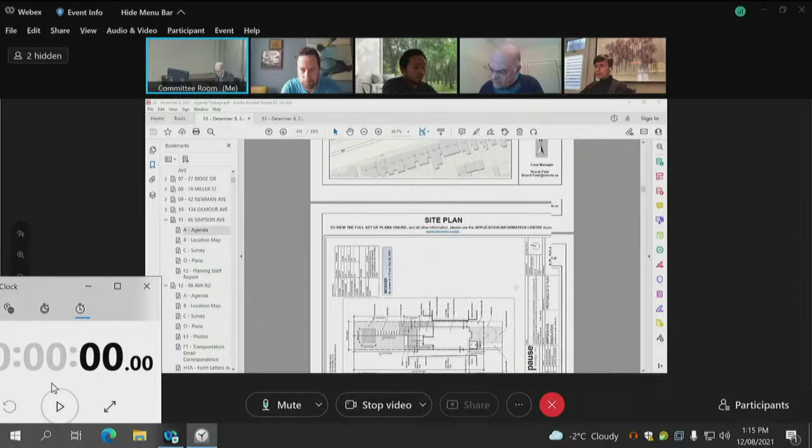So, applicant, join us please by stating your name. Afternoon, Mr. Chairman and committee members. My name is Jason Ho from Pause Design. I'm speaking on behalf of the homeowner. Very good. Thank you, Jason.

Jason, I'm just going to check. We have one person standing by who is noted to be of interest. I want to see whether that person can... Through you, Mr. Chair, that person was here. I'm looking now and they're no longer here, so I just want to give them a quick call. We'll just hold for a moment. I'd like to see if we can further define their interest in the application. So Jason, just stand by for a minute, please. Yep.

Hello, Danny Chan. Yeah, speaking. Hi, this is the Committee of Adjustment. We're reviewing 66 Simpson Avenue, and you registered to speak. Yes, there was just some technical difficulties on my side. Is it my turn to speak now?

Not quite. This is the chairperson. Could you tell me, please, do you wish to speak in support of the application or in opposition to it? Well, to be honest, I just wanted a little bit more information about the plan. I got the plan in my mail, and I had some specific concerns. I don't have any big opposition to it, but if maybe the applicant could clarify some of it, then I can probably be more in support or opposition.

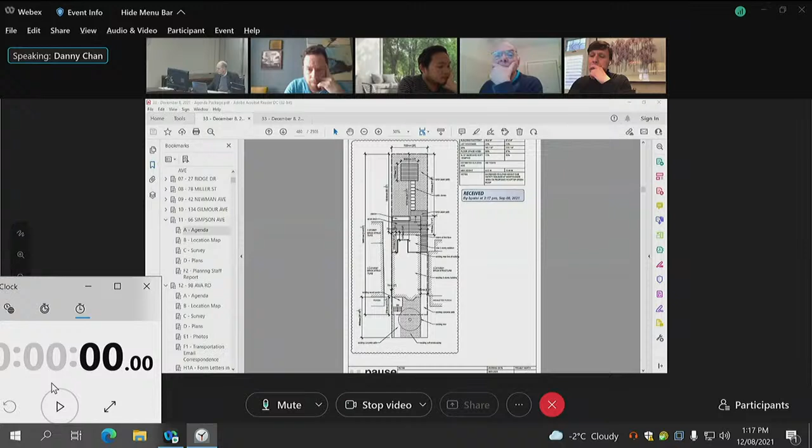Thank you. So the owners have purchased this whole structure, which was formerly used as a group home that is of a modest footprint, quite small compared to the rest of the houses on Simpson Avenue. So what we're looking to do is get a rear addition on the back side of the building, taking basically the same footprint or just slightly larger than the existing multi-story wood deck.

And the owners have a very keen interest in greening their dwelling, so we are proposing installation of an extensive green roof on the existing structure. They also have elderly family members who potentially will be moving in, so we're looking to improve some of the spaces within the house to facilitate the cohabitation.

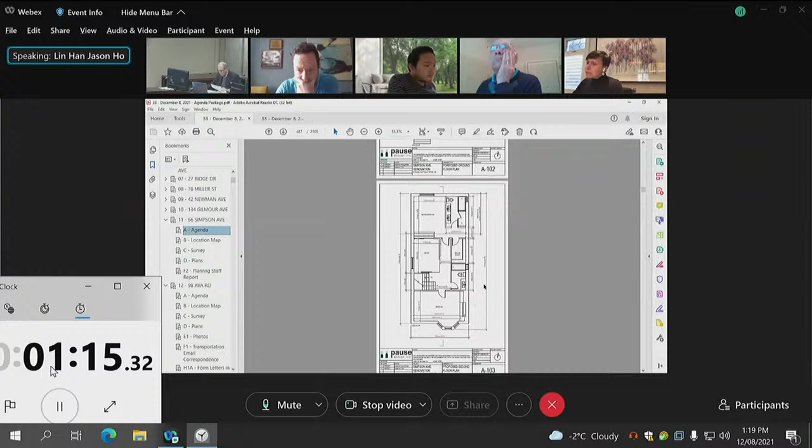So in terms of the variance that was identified, the primary concern about the height exceeding the 10 meter maximum has to do with the guardrails we are erecting on a small maintenance area proposed for the intensive green roof on the rooftop. The guardrail would put us at 10.044 meters, just slightly over the 10 meter mark, but the main structure remains below the 10 meter maximum height.

We are proposing a small utility area on the rooftop because of the intensive roof proposal, and we need a space for water connections and also a space to maintain the green roof. Because of the elderly family member, we chose to put in a full set of stairs to access that small maintenance area rather than a ladder for safety, and the guardrail is also to facilitate the safety of the family members when they're up there taking care of the green roof.

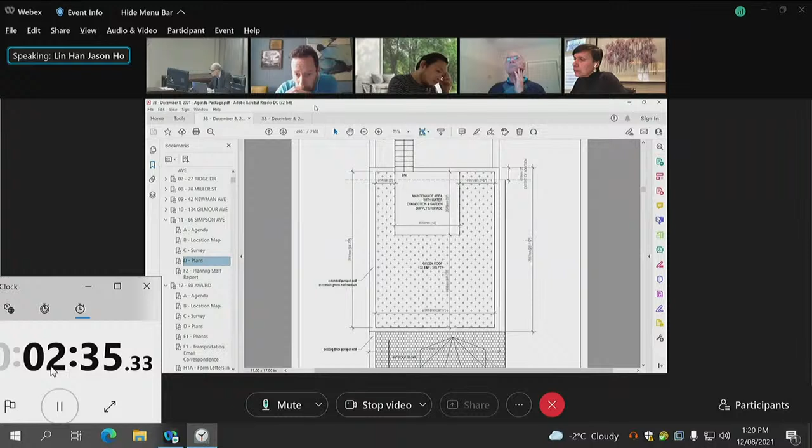So the existing structure already exceeded the maximum percentage of the main wall over 7.5 meters. That was the second variance identified. The addition is significantly lower than the height of the overall existing structure, so we are certainly hoping that the addition doesn't pose additional height challenges.

There's no parking currently available on site, so we're not seeking to change that. The existing structure is about 0.8 meters from the west side lot line, and we are hoping that the new addition, as well as the rear deck that extends out from the addition, could align with the setback on the west end of the building. So that's sort of the variances we're looking for. Thank you very much. Thank you.

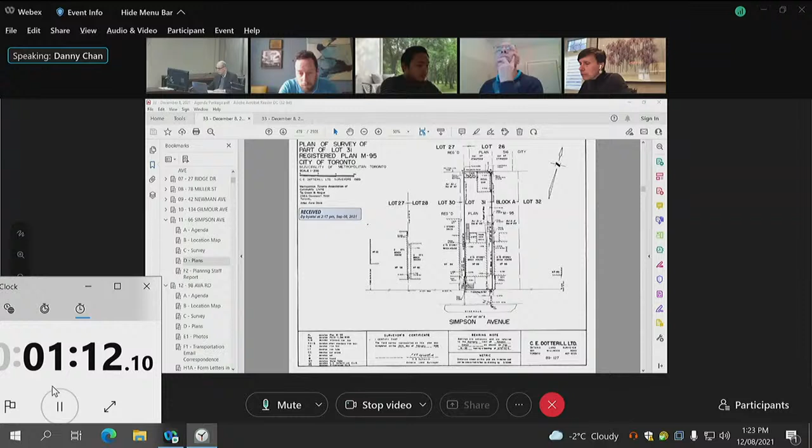We are not seeking to install any fencing different from the existing extent of the fence on site. What we're looking to do is clean up the backyard area. Currently there's some rodent infestation issues, and it's not very sightly, so we just want to clean it up.

We're not looking to impede your ingress to your backyard. So you're saying the access provisions made by the mutual drive will not be blocked, will not be reduced? Exactly. Thank you.

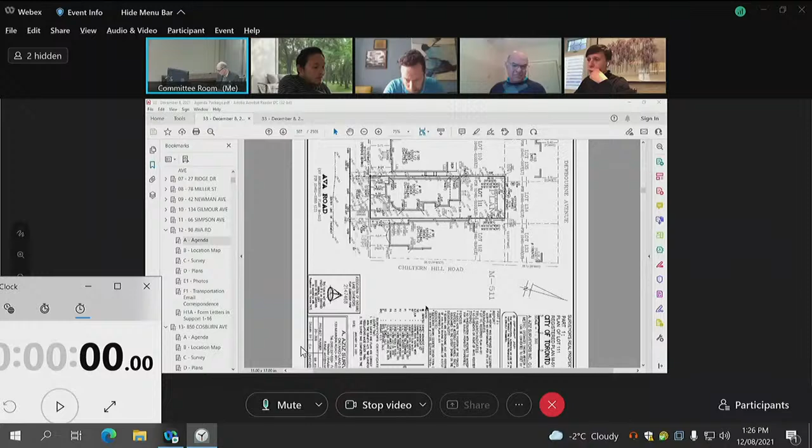The panel moves on to number 12, which is 98 Ava Road. We're looking at applicant materials: there are 5 photographs of existing trees from August, a commenting report from Transportation, and correspondence in support, including 16 form letters by owners and occupants of Ava Road, Chiltern Hill Road, and Dewbourne Ave, all received by November the 29th.

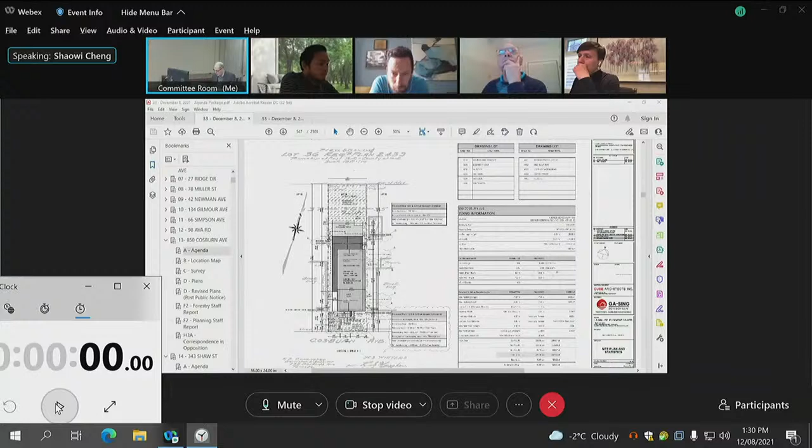Thank you. The existing house is a one-story building lot. So we have a new proposal to demolish the existing house and build a new house with 3 stories.

We are requiring relief from the requirements of zoning bylaw as amended. We have 6 variances. Number 1, the permitted maximum height of buildings is 8.5, but our proposal is for 3 stories with building height going to 9.95 meters. This is the same requirement from bylaw number 6752, same as citywide.

Number 2, the permitted maximum height of all front exterior main wall is 7 meters. So our proposal is 8.6.

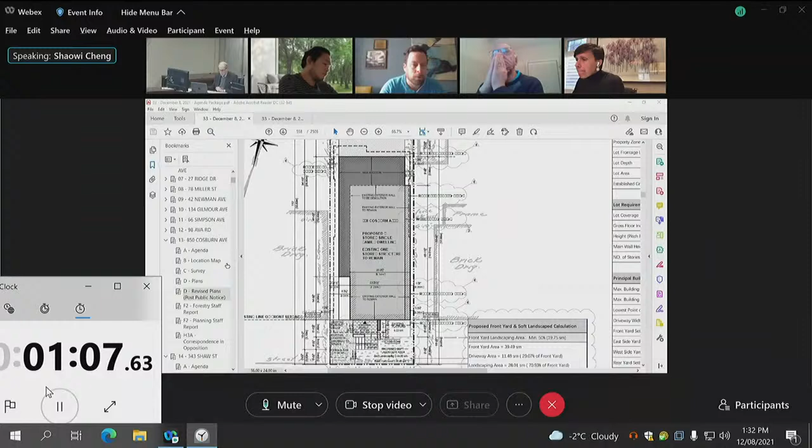Number 3, the permitted maximum FSI is 0.45, so our proposal is 0.98. Number 4, the permitted maximum lot coverage is 35%, so our proposal is 43%.

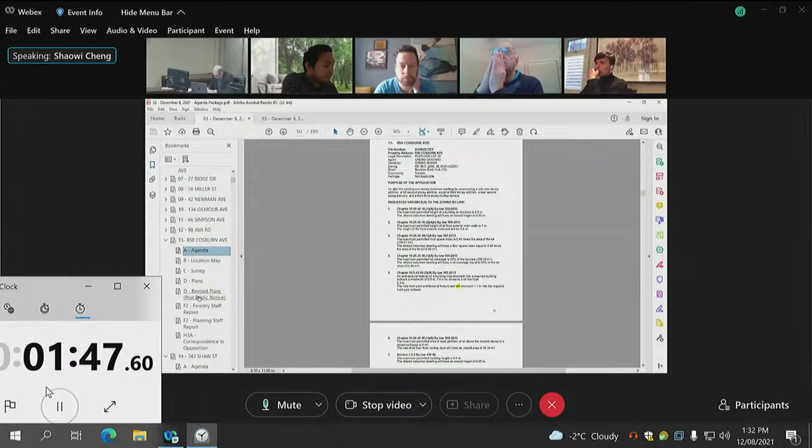Number 5 is the architectural feature wall, so you can take a look at the front elevation. There is a particular decoration wall that is extruded to the front yard 1.1 meters, but based on zoning bylaws the required maximum is 0.6. So the front elevation, I think on another sheet, yeah, this one - this wall.

Number 6, the final variance is regarding the roof terrace. Bylaws state the maximum area for the roof terrace is 4 square meters, so our proposal is 9.76. After we discussed with the planner, based on their suggestion, we reduced the original 40 square meters down to 9.76. So totally 6 variances for today, that's it, thank you.

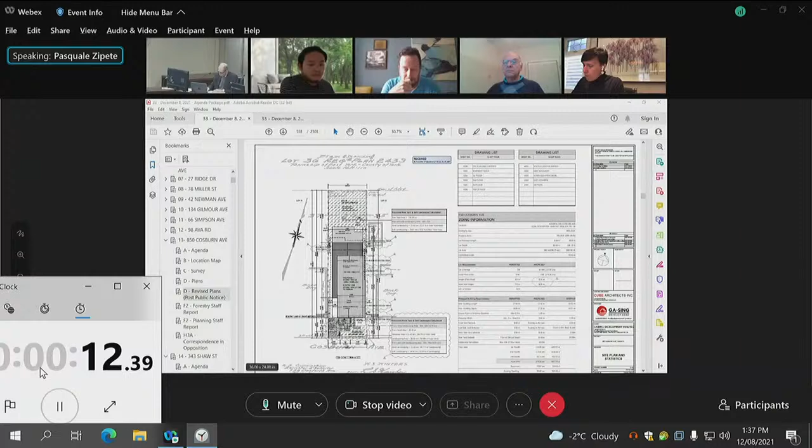First, if you look at the frontage of our homes, pretty much every front balcony and front door is completely flush. From the corner of Rednor to Woodbine there are 4 homes, and we're all equal - if we open our front doors we can see across. This new development's front porch will go at least 3 feet, 4 feet 3 inches further out than our homes. Then there's the issue of height, which is 1.45 meters higher than my home.

We have a bay window on the side of my house, which will face their side. I'm on the east side, so that wall will lose all kinds of sunlight because of the 3rd story. I have a 2-story house to my left on the east side, which I don't oppose - they did renovations a couple years ago which were great.

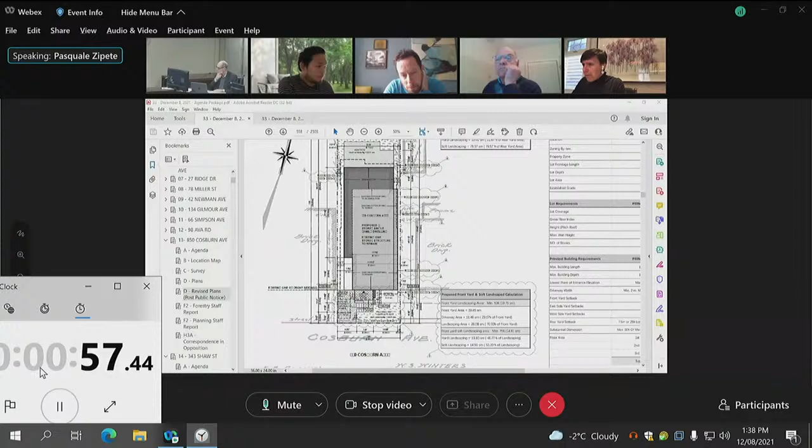The square footage of the home is also much larger. They extended the house further back, almost 9.9 feet, and I have a deck in the back where we spend most of the day. I have 3 kids who are in the yard, we sit on the patio, so we're going to lose a lot of sunlight.

The other concern is the front - there's multiple concerns because almost all of what they're requesting is way above the standard. We're 4 homes on this block of Cosburn between Rednor and Woodbine, and there's a 2-story home to my left, and we all follow within code. The 3rd story is really high to me.

I'll lose a lot of sunlight, and especially in the backyard they'll lose privacy because they're going to put a back deck patio looking over our backyard. There was one more concern I had.

The size of the home is a lot bigger, but there are a lot of variances. If you look at the houses in East York, especially on our block, they're pretty much all the same - if there's a 2nd story, it stays within the width and length of the home. They don't exceed almost 10 feet, losing all that sunlight we have in the back.

There's a couple other issues I had. I'm worried about water runoff, because with that 2nd story and the drainage, now they've occupied more of their property, and hopefully they can properly manage the rain into the grass.

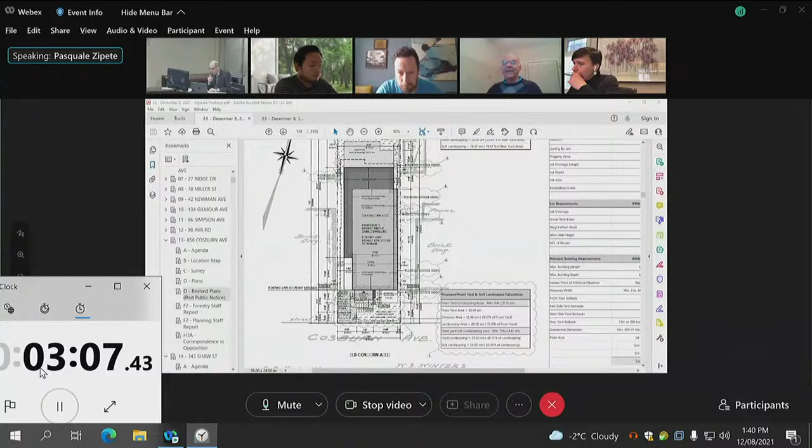Thank you. Panel, any questions for the speaker?

So we've heard from both the neighbors on both sides of the subject property.

Okay, let's go back to the applicant. Thank you, applicant, you've heard from both of your neighbors on both sides. They're both concerned about your development. Go ahead.

Okay, can you show the site plan on your screen? Basically, look at the front wall - it is flush with the existing house. The light gray area is the profile line of the existing house, so the front wall still stays there. We are not going to project or extrude into the front yard, so we are not going to block the view from the neighborhood.

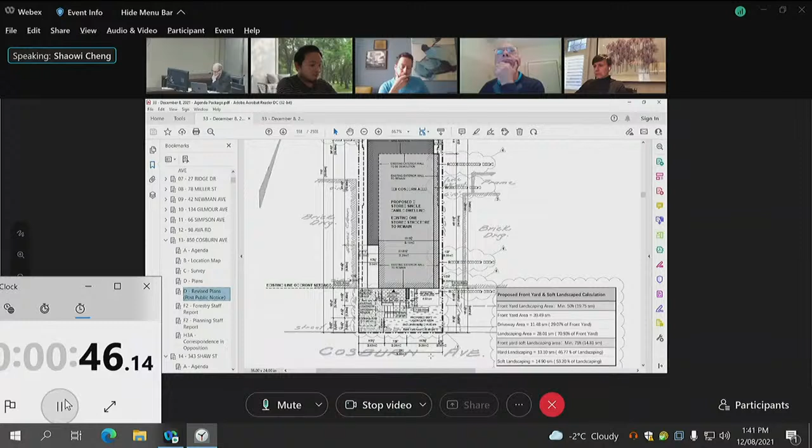Second, we have a 3-story building, but actually only 2 stories from the front and back. The 3rd story is set back, as is even the 2nd story setback. Can you take a look at the side elevation, please.

Side elevation. Right side is the front, left side is the back. On the right side, 3 stories, but 1 was setback from the front, so only 2-story in the front, about 6.83 meters. In the back, we still setback on the 3rd floor, so we don't want to make the building very aggressive. Look at the dotted line showing the existing building outline - the front wall basically is there, so our proposal is to flush with the existing wall.

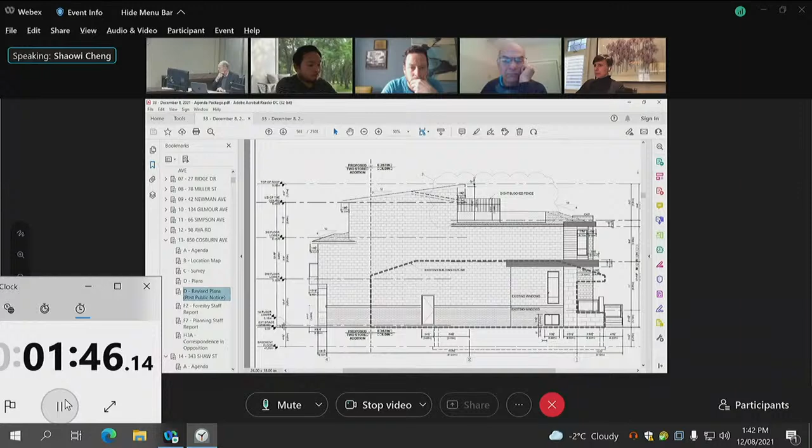Regarding the driveway, our right neighbor said they have a driveway in the backyard. But our house is just within our property and the setback from the property line, so I don't understand how adding new construction will impact their driveway. Another issue is regarding water runoff - adding construction here, we are not changing the horizontal stormwater collection area. Whatever we do, the lot area is still there, so the water from stormwater, we are never going to change the collection area.

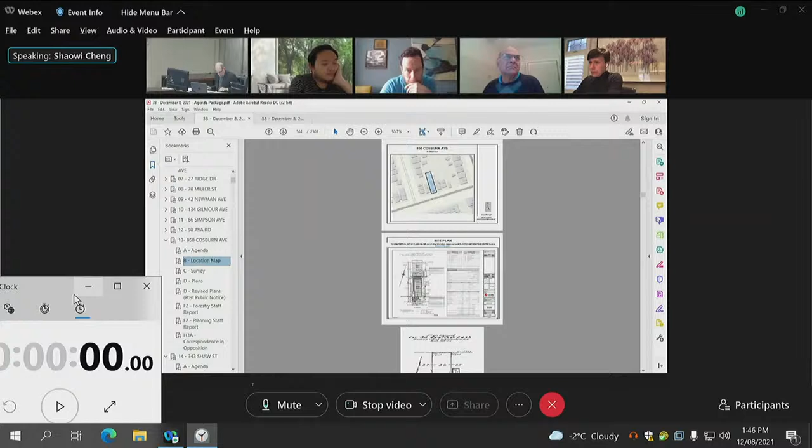Regarding three-story buildings on this street - 820 Cosburn Avenue, only 5 houses away to the west, is a three-story building. Another three-story building is 301 Woodmount Avenue, 7 houses away.

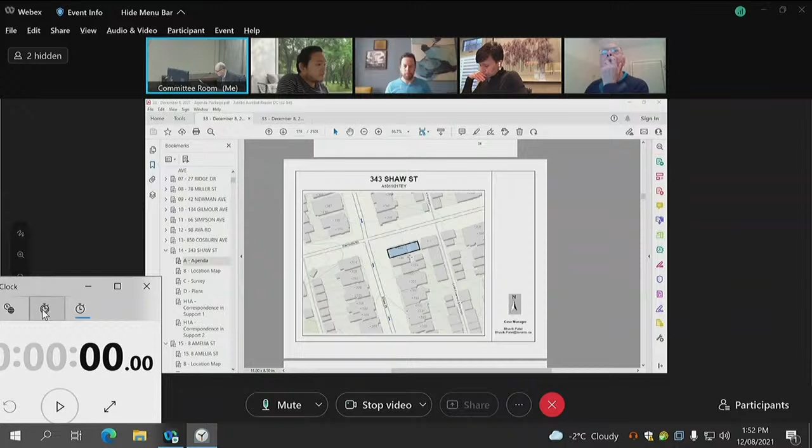Panel moves on now to number 14, 343 Shaw Street. On this application, we have applicant materials, and we have support correspondence from 7 Harrison, from 306 Crawford, and there's a 5 signature petition in support from owners and occupants on Crawford and Shaw. That came in on December 2nd.

Okay. We shall therefore ask the agent to join us by stating your good name. Good evening, Mr. Chairman, and all the committee members. My name is Amir from Scorvis Architects, the agent on behalf of the homeowner at 343 Shaw Street.

Very good. Okay, agent, I'm going to ask you to stand by for just a minute. We also have registered to speak a party from 341 Shaw. Is that party with us? Okay, let's just see whether we can clarify that party's stance or interest in the application.

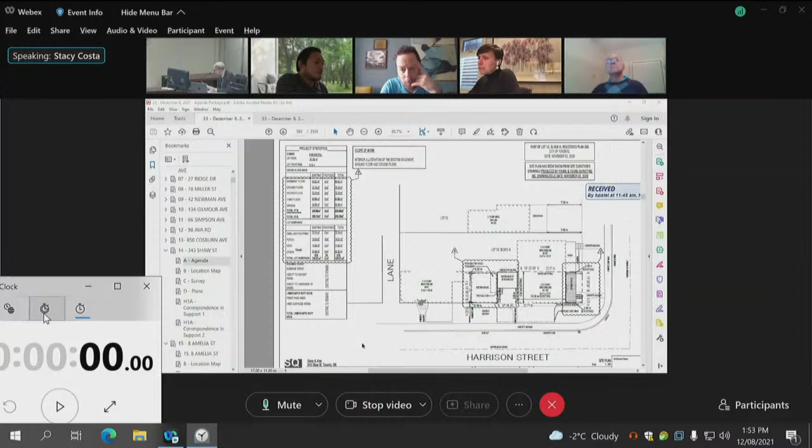Stacy Costa, could you let me know? Hi, good afternoon, Stacy, I'm your chair. I want to ask you simply, Stacy, are you wishing to speak in support of the application or in opposition to it? We wanted to speak in support, but we just wanted to clarify as well, just 1 or 2 points. Hopefully Amir could do that for us this afternoon.

Okay, then we'll ask the applicant to make a quick presentation. Okay, stand by, Stacy. We'll go back to the agent, Amir. If you wanted to, we don't need a full presentation. We just need, if you could outline the high points or the main thrust of your application, that would assist. Go ahead.

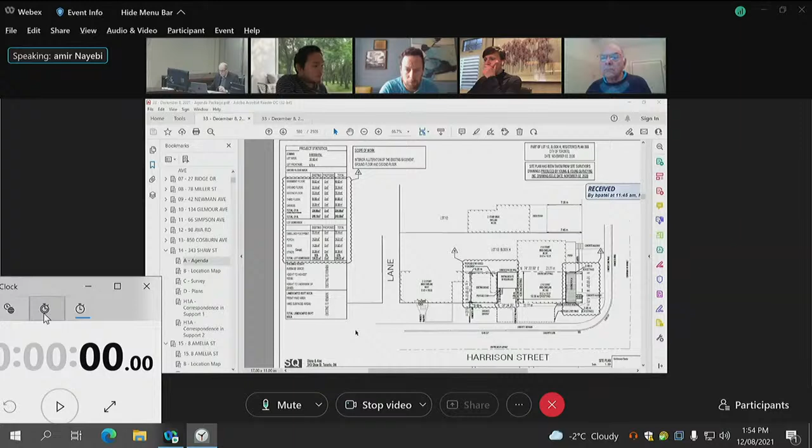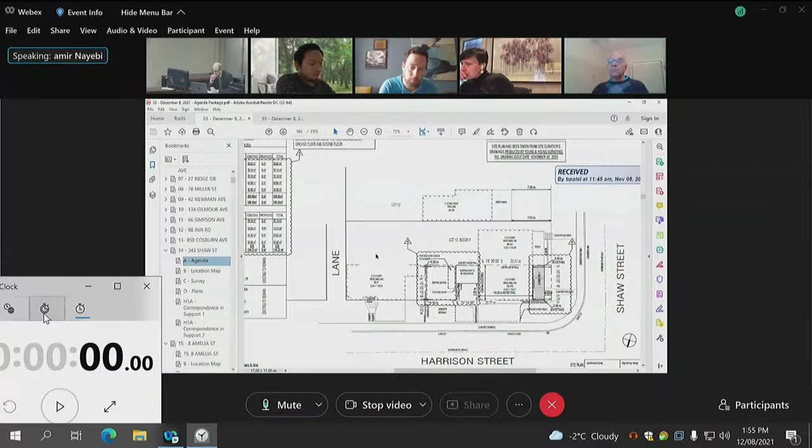Not a problem. I'll keep my presentation short, since genuinely we believe that the variances in this project are minor in nature and mainly triggered by existing conditions. I would like to start by adding the primary scope of this project was focused on interior renovation, with the exception of the new front dormer roof. We have 4 variances. Relating to item number 1, there had been an existing concrete deck at the walkout that was in poor condition, and in an effort to restore this access and prevent similar water damage issues in the future, we have proposed to relocate the stair into the existing garage. This is what has triggered the variance, since the existing detached garage location rightfully had only a 0.15 meter setback, and now it's considered like an attached garage.

The setback is unchanged from 0.15 meters. In other words, we are not doing any additions to this project. Everything is existing condition. All the existing walls remain as is.

With respect to item number 2 and 3, I'd like to highlight again that there has been no additional square footage added to the existing 3-story dwelling, as outlined in the site stats, page A101, right on the corner. If you want to present that to the neighbor on the left side, it's clouded with item number 4. We're using cloud number 4 on the left-hand side of this sheet, the site stat.

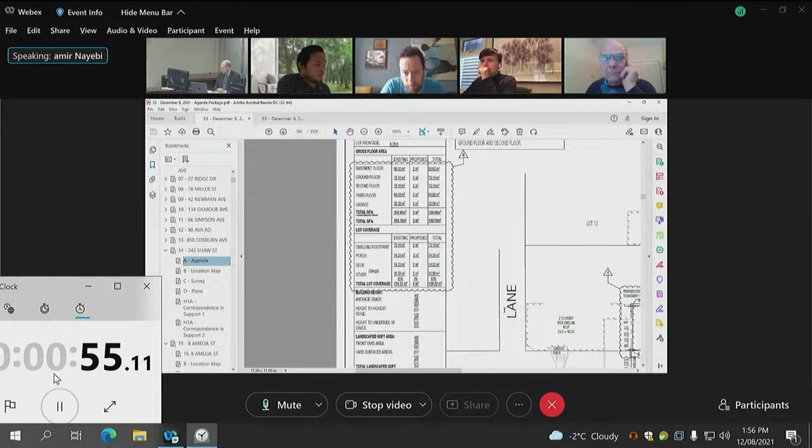As presented here, there's no additional square footage being added, which relates to both item number 2 and number 3, which has to do with FSI as well as the front height of the roof. We proposed a modest dormer with a similar angle to the adjoining property roofline to maintain and respect the streetscape.

I would like to also add the original 1900s house design did not adhere to this variance number 3 to begin with. Relating to variance number 4, this has been an existing condition again, and this proposal did not trigger this variance. We're only proposing minor relocation and resizing of windows to accommodate the interior layout.

Finally, I would like the committee members to acknowledge that our first plan triggered a total of 7 variances during the zoning review, and this could be part of the confusion for the neighbor. This was mainly related to the size of the rear deck and the enclosed existing porch. Despite the planning team's support, we revised the plans in efforts to reduce the variances and respect the bylaw, for which we've gone from 7 to 4 variances at this point.

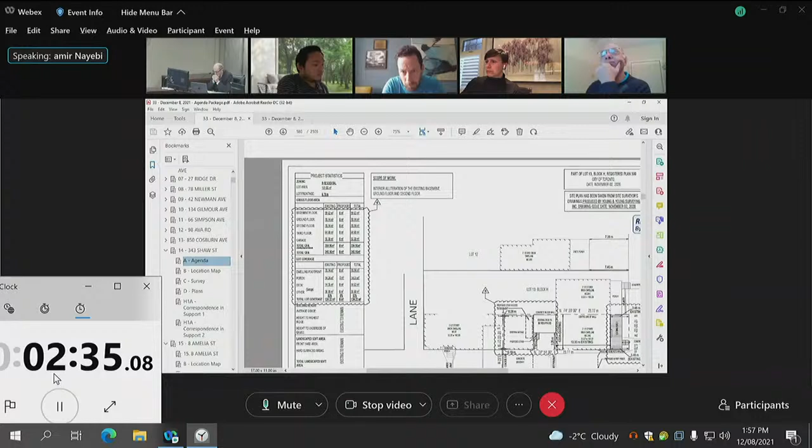As mentioned earlier, most of these variances were triggered on an existing condition that remained. This was a 3-story building, and it's remaining a 3-story building. No additional exterior work has been done except for the front dormer detail that we provided. So on that note, I'll close it off and I'll answer any questions that the neighboring property at 341 Shaw Street has. Thank you very much.

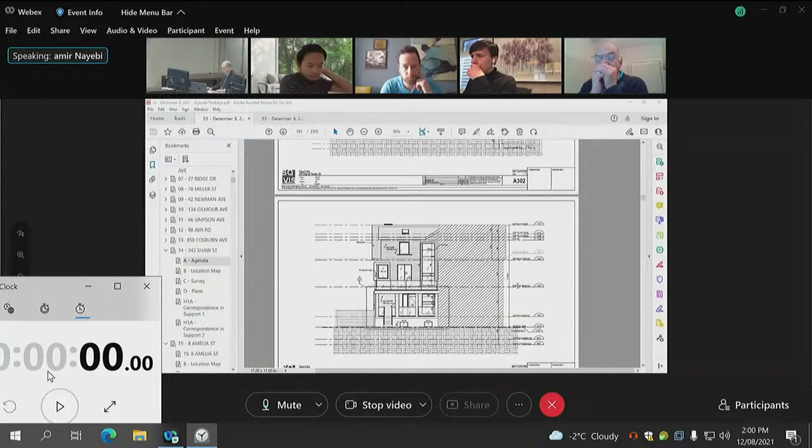Thank you, I guess it's more clarification. I originally thought you were adding the basement level addition under the porch in the back, but that's already there, existing, right? The connection? That was the existing condition, and we're essentially using that passageway to get into the garage instead of having the walkout in the backyard. That was an all concrete deck that needs to be redone mainly due to water damage that would happen to the property. The living space underneath is existing then? It is a living space, existing living space condition. Yeah, okay, I didn't realize that at first, but that's fine, thank you.

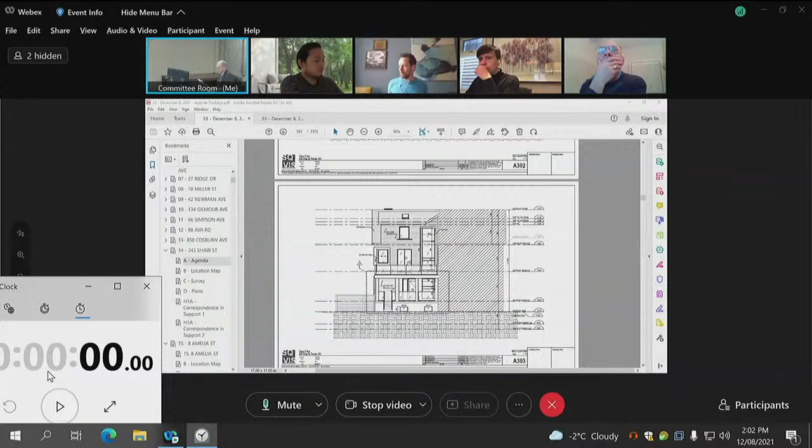My question for you, applicant, is this: you mentioned that several of the variances were existing conditions, and I just wanted to get clarity - those existing conditions, how old are they? Why are there various items that are existing conditions that don't fit the bylaw? So item number 3 and 4.

Can you guys hear me? Sorry. Yes, go ahead. Yeah, sorry, it showed muted on my screen.

Item number 3 and 4 had to do with the architectural scope of that neighborhood in the 1900s. Essentially the way they connected the two adjoining semi-detached properties, they would have that nice pitch of roof shared in between, giving the illusion that it's a bigger house. And that has always been over 7.5 meters in most of my applications. So that item is really one of the existing conditions based on the heritage of the design of that neighborhood, and it kind of remained as is.

In terms of the FSI item, this was deemed a 3-story as far back as we can remember, as far back as we saw in permit packages or anything on record. Also, there is an active permit right now from my firm, still deeming it a 3-story, doing the underpinning permits and everything else adhering to that.

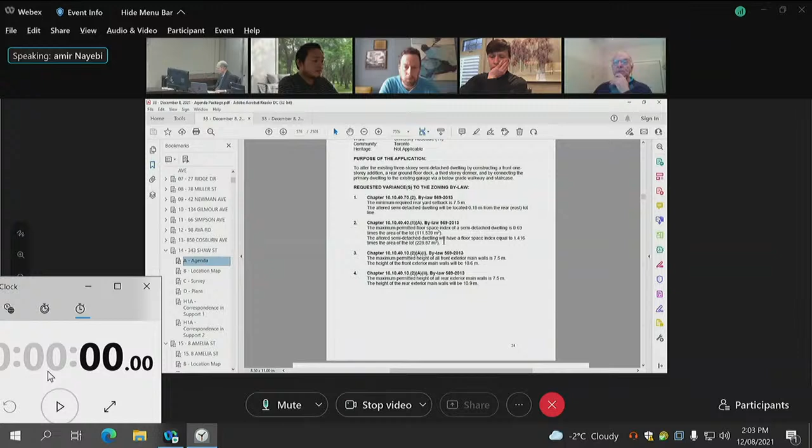Now I get it, item number 1 is clear. Now I get it, thank you for that. Okay, no worries. We'll take the application into committee and move to a motion. Anybody wanting to comment? Sorry, through you, Mr. Chair - Stacy did not state her address, but I just want to have it on public record that it is 341 Shaw Street. Thank you very much.

Panel members, Mr. Reed, go ahead. Thanks. I think as the applicant said, most of these variances are existing conditions based on the original structure of the house. What's being proposed are all quite minor architectural works, basically updating the exterior with no real material changes. I think it's a benefit to the property to have the exterior stair to the basement moved into the garage, connecting that up - I think that's a smart thing to do. And I'd like to commend the neighbors for being in touch with each other, civil and getting along - that's always nice to see. So I think what's being proposed is truly minor and completely supportable.

So I move a motion to approve with no conditions. Thank you so much. That is seconded by Ms. Valentini, and it is moved and seconded to approve. All those in favor? Show of hands. Unanimous vote to carry the motion and approve the application. Thank you.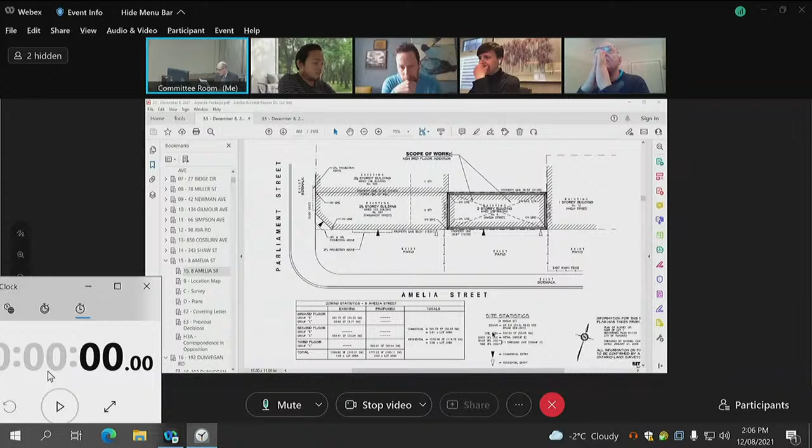Good afternoon, Mr. Chair. I'm the applicant, Trevor Gaines, here on behalf of the owners. Good afternoon, Trevor. Trevor, you'll have 5 minutes to present your application to the panel. Please go ahead.

We were at the Committee of Adjustment, I'm not sure if it's this panel or not, to approve a second floor for a new dwelling unit over top of a restaurant space. As this project has been under construction, given the limited size of the space and the mechanical requirements for the restaurant plus the heating, cooling and duct spaces, it really chewed up the available space on the second floor to make an adequate apartment, not only for building code sizes, but just usable space.

So it was decided to add another floor to this building, not for another dwelling unit, but just to expand the dwelling unit, pushing the bedroom up to the 3rd floor. As a result, it triggers some variances, mainly all resulting from the lot size.

For example, variance number 1: rear lot line proposed is 0, but the required is 7.5. But our property is only 4.75 meters deep, so that's impossible to get. And because the building occupies almost 100% of the lot, anything we add just triggers additional coverage. Instead of 2, we're asking for 3 because of the 3rd floor. And with the 2nd floor residential, it increases our allowable residential mix from 2 to 2.09.

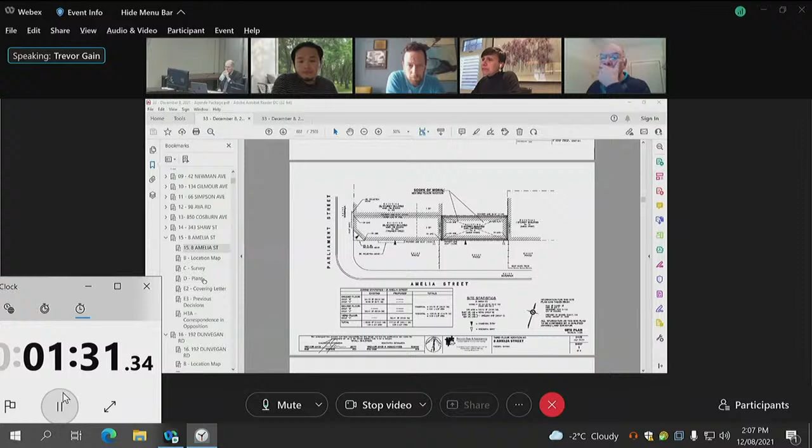So overall, we do think this is fairly minor. It's just a result of the construction requirement for the ground floor tenancy of the restaurant, and we seek your approval.

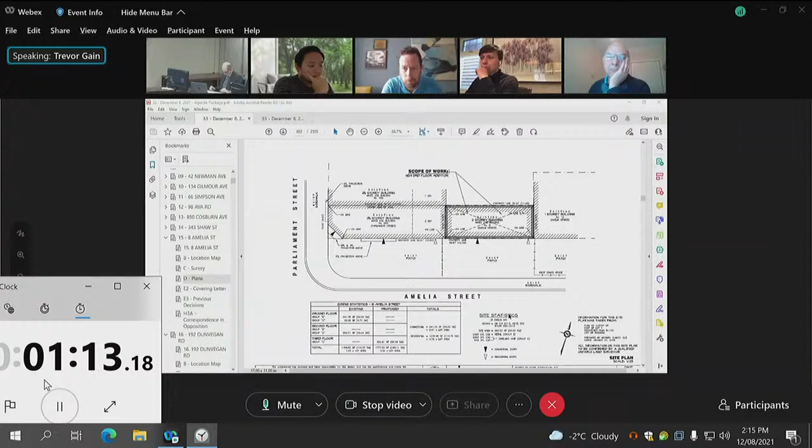We do realize it's a heritage district. We reached out to Heritage after the first committee of adjustment, including this one. There's no comments on file. Everything is in keeping. We do recognize that this is part of Cabbagetown, so I don't know if maybe we can put up the elevations. If we could just scroll down a couple pages to the front elevation, this one. The design, the 3rd floor is really kind of an attic space. We did a sloping roof, picking up on the 3-story houses, the row houses down the street, dormers, the siding, all in keeping. Again, working with Heritage on that.

So this is a residential component, this is not a commercial component, and maybe the neighbor was just misunderstood. But like I said, we have no patio. So if she's referring to the CaféTO program, that's a completely separate entity and not in front of you today. And I think those are my comments.

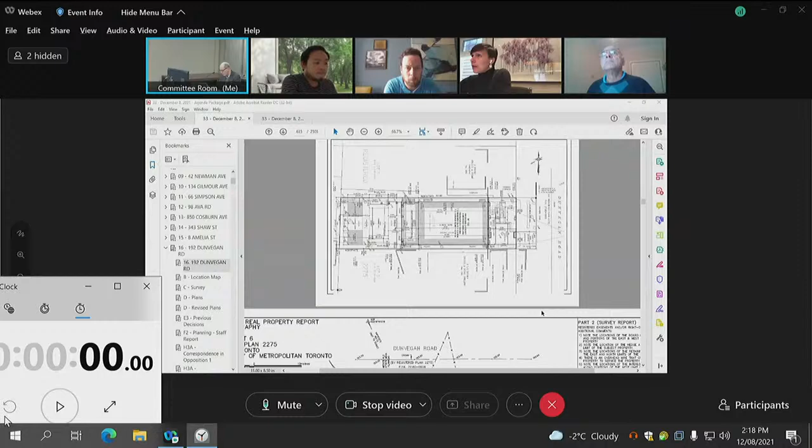Here we are looking at applicant materials. There is a revised site plan and floor plans and elevations, dated 1 December. There is a previous committee decision, and a staff report from community planning. In opposition, there's correspondence from 190 Dunvegan, 57 Hillholm, and 200 Dunvegan.

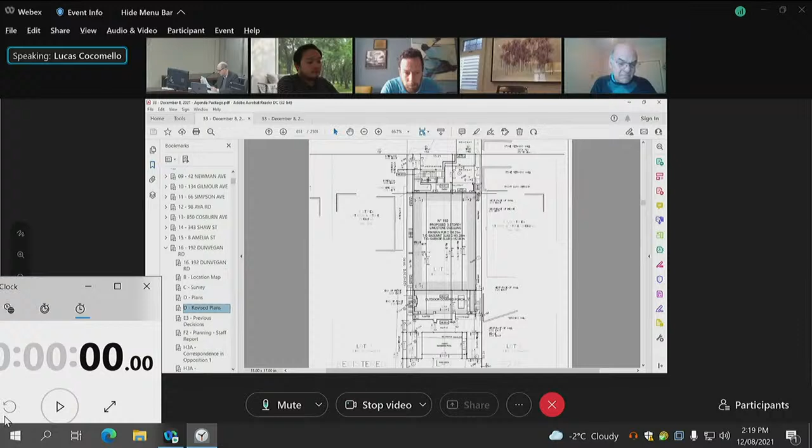Afternoon, Mr. Chair and committee members. My name is Lucas Cocomello from Schiller Engineering, residing at 2157 Royal Windsor Drive. I beg your pardon, your voice is a bit muddy somehow, would you state your name please? Sure, do you hear me better right now? It's a little louder, which does help. Okay, my name is Lucas Cocomello from Schiller Engineering, residing at 2157 Royal Windsor Drive. Thank you very much. Okay Lucas, we're having a little trouble, I'll let you know if we can't understand, but your voice is just a touch muddy for whatever reason. Let me try something, might be my headphones. Do you hear me better right now? That is better, it's a touch too loud, turn it down a touch, but that's much better. All right, I think we're in good shape now.

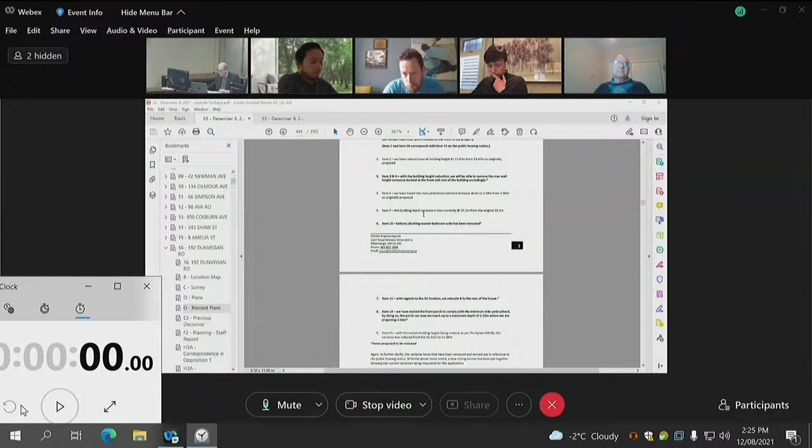Very good, thank you for that. Now, let me just ask you - are you familiar with the staff report that was provided to the committee by community planning on December the 1st?

Yes, I spoke to, I believe her name was Catherine Chung. She was the main respondent on this project. We both discussed everything on this job, and the items she has noted are in line with the most up-to-date plans that were submitted to Committee of Adjustment.

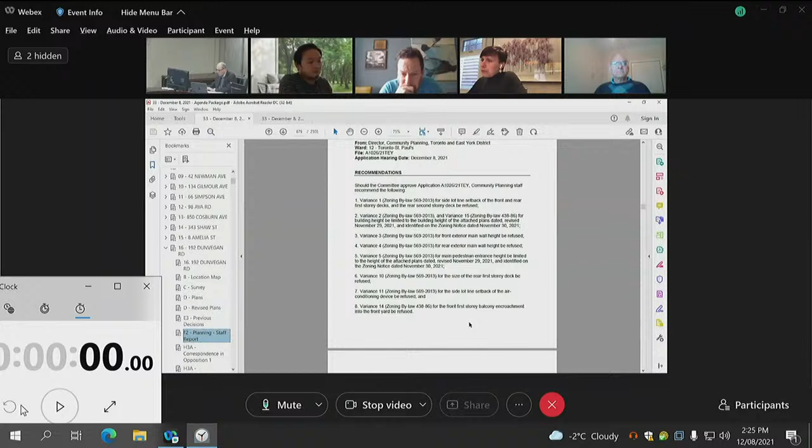Okay, let's... are you saying that you've seen the staff report dated December the 1st? Yes, correct, I've seen it and reviewed it. So you have seen it, and then you took what action having seen it?

Okay, let's go back here. Have you seen the staff report dated December the 1st, which is very detailed, unlike staff reports the committee sees very often, in its detail of which variances ought to be refused in the opinion of planning and which ones ought to be revised? So did you take any action to revise your application in light of that?

Yes, we revised our drawings for the subject property based on what planning has requested. Through you, Mr. Chair, perhaps Lucas can go through the variances that are being revised for public record. I think that's going to be important, Lucas.

Okay, so for the public record, it's important that now that we're here in the Committee of Adjustment meeting, we're going to need to go through the variances in the notice and work one at a time through them with you, so you can specify your intention for how you want the application to stand today as the committee considers it. So let's go to the list of variances, and we'll keep it quite short.

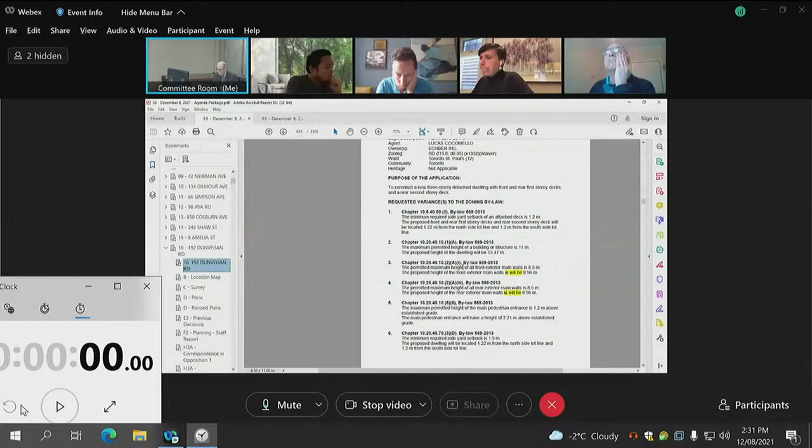Lucas, to confirm, the second-story deck is related to the balcony for item number 10. So the rear second-story deck is to be removed, yes. We'll change that wording. Thank you, good, very good.

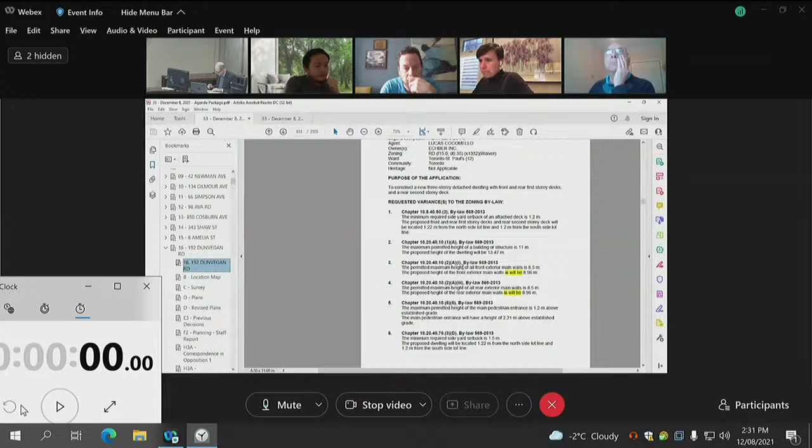Okay then, thank you for that. Panel members, any questions of the applicant at this stage? No. Okay, then we do have some registered speakers standing by, so we'll go to them now.

Oh hi, I believe I'm unmuted. Yes, you are. Could you state your name, please? Yes, my name is Deborah Zucker. I'm the owner of 200 Dunvegan Road, the house immediately to the east of 192 Dunvegan. Very good.

So I guess I'm going to speak a bit towards the original application, but I still feel that many of these variances still exist in the... Oh, okay, Deborah, have you taken... Okay, go ahead, you have 5 minutes to address the panel, so go ahead.

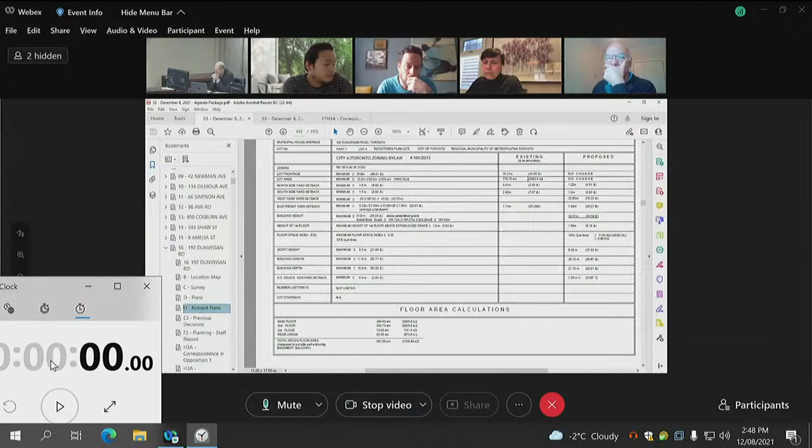Oh, here we go. Was it on there? I can't see. Sorry, I'm trying to find it in my plans. And can somebody write down the existing heights? So you don't know what the existing height or the existing FSI of the current house is? I know you're taking it down and putting a new house up, but I'm trying to get a handle on the size of the new house compared to it.

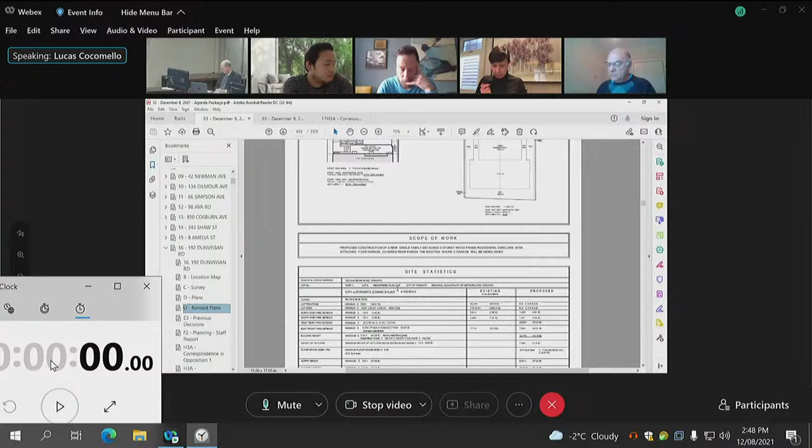Sorry, I don't mean to interrupt you, but the existing house is 435 square meters based on the 2001 decision that was issued. That was also posted online. Okay, and what is that in terms of - I guess I could look. How does that compare with the current FSI you're asking for? Okay, so you're asking for a fair bit over what was last posted. Oh, okay, the prior variance.

And then the other thing is, did you - I noticed this is a waiver, but I think I heard you say, and I know the neighbor at the rear was speaking about the soft landscaping - how is it possible that there's a variance for that? And then when you look at the plans, are you saying the pool is the only quote unquote soft landscaping feature at the back? That's what it looks like based on the site plan. So, and that qualifies? I don't see any other softscape, but maybe I overlooked it.

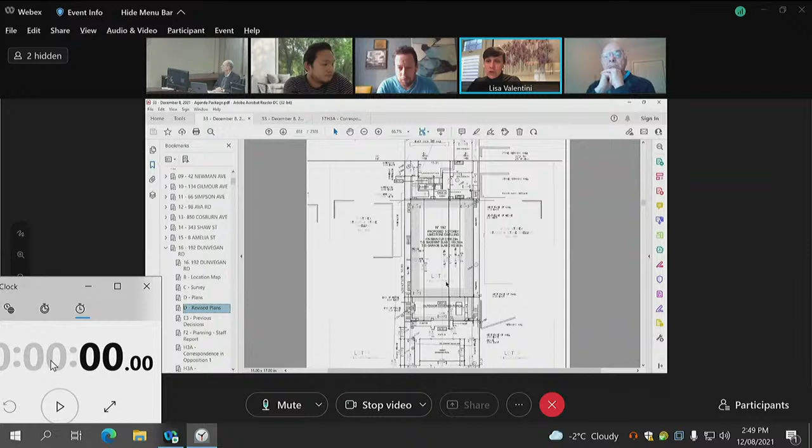So we have grass immediately around the property lines, the side yard property lines and the rear yard property line, going all around. You may have to zoom in a little bit more.

So where we show sod, that's essentially where the grass area is, and based on how the zoning bylaw reads, we've placed the swimming pool area within the rear yard soft area, because it's basically containing water within the actual boundaries of the swimming pool itself.

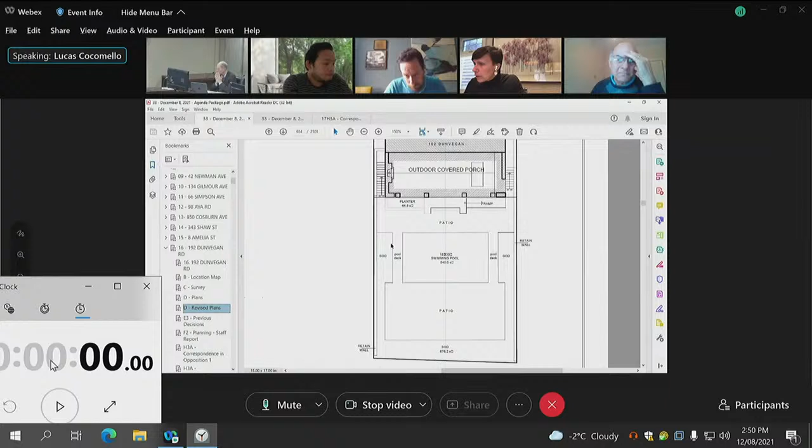Oh, okay, that doesn't look like the revised plans, I guess this must be the site plan, but it doesn't show softscape, it doesn't show sod on the revised site plan, so maybe I just assumed what looks like to be the pool deck is softscape.

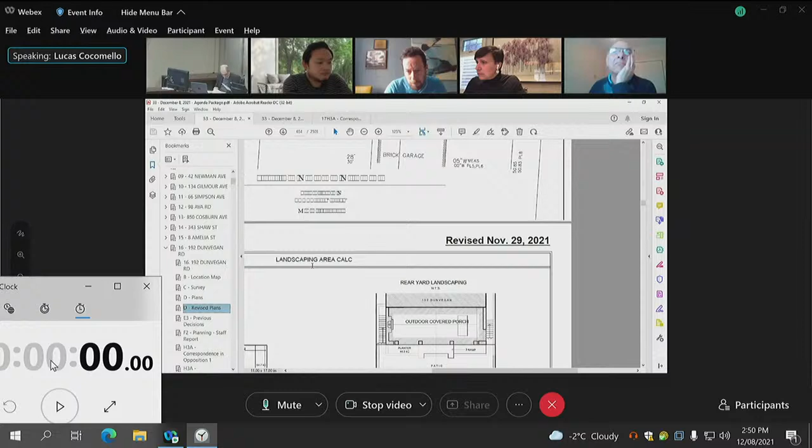So there is sod around the perimeter of the patio. And so that would be around the pool equipment, the covered lounge, and the kitchen and bar area? Yeah, all the way around that space is gonna be sod.

Okay. Thank you. No problem.

Further questions for the applicant panel? I guess one other thing, do we have urban forestry? We heard some issues about trees. Do we have any urban forestry conditions or anything? Nothing, I didn't see anything, no?

Can I say something about that? I noticed that as well. They didn't post a report requesting that we get a tree permit. We've already submitted a tree removal permit for the application back in June or July. I'm not sure if that was relayed over to the committee members and chair, but we've already submitted a tree removal permit, and it's pending committee approval for this.

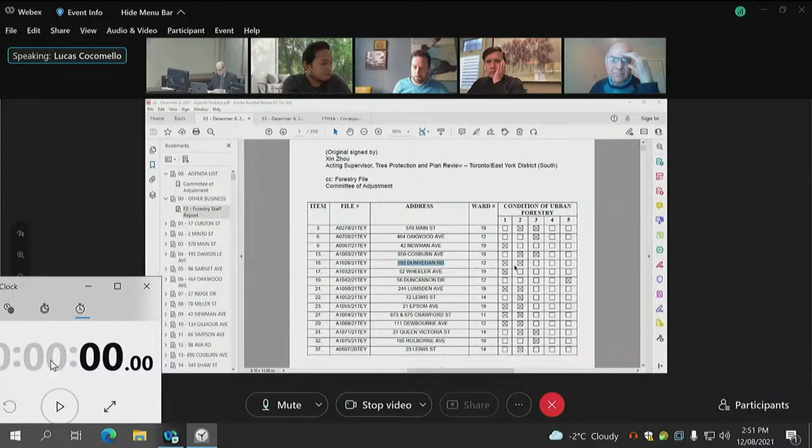There it is. So this wasn't posted online, so I think it's just the 1 and 2. I don't see any communication here from Urban Forestry to Committee of Adjustment. Through you, Mr. Chair, yes there is, it's the standard forestry report, it's on the screen right now. Oh okay, pardon me, it's under other business as part of our materials list. Okay, thank you.

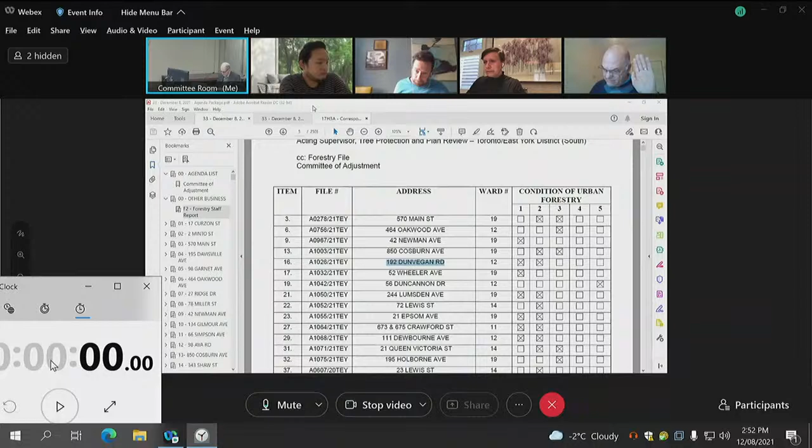Thank you, Mr. Chair. I'd like to commend the agent and the owner of the property for coming up with the revisions and making adjustments to a variety of variances, as well as deleting a number of variances requested. I do have one question though. Variance number 6 still remains and is recommended by planning that we refuse that variance. I'm not sure if the agent has any response to that.

Variance number 6. Number 6. Can we have the staff report brought up, please? Pardon me. Can we get the staff report on screen? Okay, we'll do that.

So, variance number 6 isn't proposed to be removed. Are you talking about number 6 under recommendations? I'm looking at the planning staff report that says item number 6, variance 10, for the size of the rear first story deck, be refused.

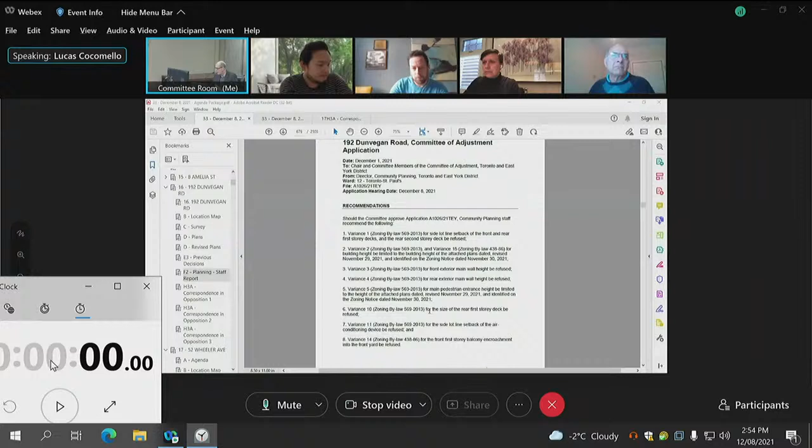That's fine, yeah, we're aware of that. But you've asked for variance number 10, the question to you is. Oh, no, no, variance number 10 has been deleted. Yes, it's been deleted, Mr. Byatt. Okay, thank you, I'm sorry, I'm looking at it as item number 6, but it's variance number 10. You're right. Yeah, thank you. Okay.

Okay, then in that case, panel, we're in committee now, and if anyone on the panel has thoughts to offer here, that's fine, or we can go right to a motion, whatever panel members choose.

Mr. Reed, go ahead. I'll start, and I think we're all delaying because this isn't a very easy file. I do respect the fact that the applicant has removed a bunch of the variances being requested, but it's hard to take these in on the fly and understand what this actually means. That's part of my challenge here, understanding, okay, that's great, we've lost a lot of variances, but is that a meaningful impact on the application? I'm honestly not really sure, because it's hard to tell from the plans.

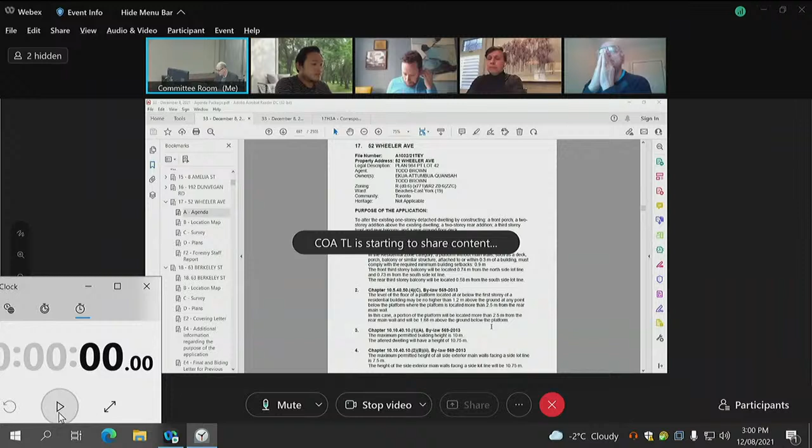And with that, the panel moves on to number 17. On number 17, we are dealing with submitted materials, staff report from Urban Forestry, and correspondence in opposition from 54 Wheeler. Looks like that would be next door, Mike Sanderson. Okay then.

Good afternoon, Mr. Chair. Oh, good afternoon. My name is Dino Giulietti, I'm the architect of this project. My address is 19 Ferronia Place in Woodbridge. Thank you very, very much.

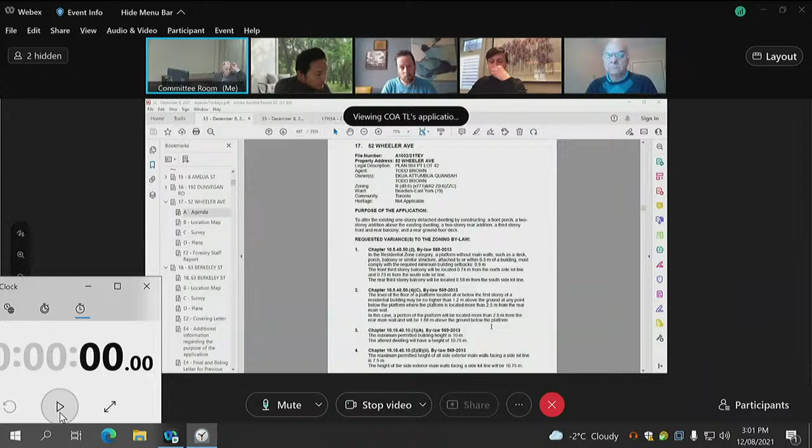Let me just check with the moderator on whether or not we have a speaker standing by. We do. Okay, Mr. Giulietti, you have 5 minutes to present the highlights of your application to the committee, please. Just before you begin, sir, I've noticed your mic volume is going from high to low. If you can just stay in one spot in relation to the mic, it'll help us hear you better.

Okay, no problem. We are proposing an expansion and a renovation to an existing one-story single-family dwelling. There will be multiple two-story additions, one being over the existing one-story single-family dwelling, and the second being rebuilding a poorly constructed one-story rear addition and expanding above it. We are also proposing underpinning, interior alterations, a new front porch, a rear deck, and two third-story balconies, one in the front and the other in the rear.

At this point, I'd like to address each variance. Variances 1 and 2 are similar to each other. The proposed third-story balconies simply follow the outline of the stories below. The balconies will be no closer than the existing side main walls for both front and rear third-story balconies in relation to the side property lines.

Variances 2 and 9 are similar to each other. They are required due to the existing topography. As mentioned in the notice, a 2.5 meter encroachment into the rear yard setback is permitted. However, we exceed the required side yard setback due to the land sloping downwards from the front of the house toward the rear. The ground floor is much closer to grade at the front of the house than at the rear, so when you walk out onto the rear deck, there is no way to avoid exceeding the maximum 1.2 meters height above what's permitted below the platform.

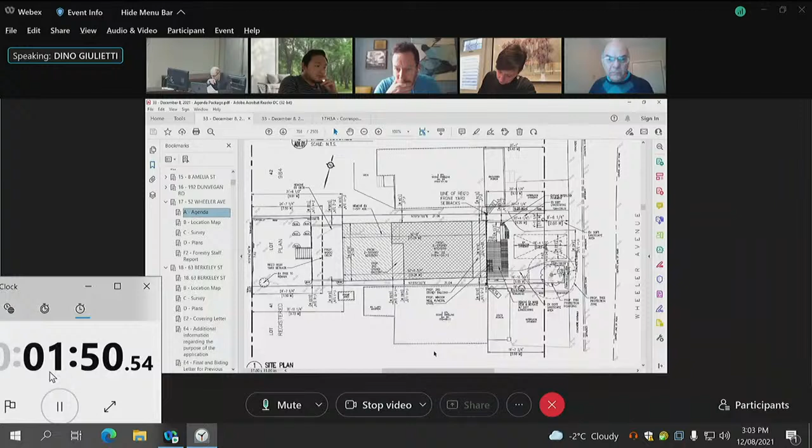Some other properties granted a height variance on Wheeler are as follows: 84 Wheeler, 10.53 meters; 112 Wheeler, 11.29 meters; 152 Wheeler, 11.08 meters; and 154 Wheeler, 10.97 meters. With these 4 examples, the average height is 10.97 meters, which is higher than what we are seeking.

Also, the first 2 stories in front of the house maintain the existing permitted front yard setback, while the third story was stepped back 1.5 meters from the front main wall in order to mitigate the impact of the proposed building height on the streetscape. We did not want to have a flat 3-story wall on the front of the dwelling. The third-story rear main wall was also stepped back to allow more privacy for the neighboring backyards. By going up, we did not require variance for the building depth and have been able to provide a similar sized landscape area in the rear yard as to what is currently present.

I also had some correspondence in regards to the height with planning, and they felt that we had done enough and had decided that planning did not need to comment on our application.

Variance 5: although we exceed the maximum permitted sidewall height, we have tried to minimize the amount of sidewalls on the third story. The west face of the proposed third story is only 0.44 meters west of the second floor main wall of the adjacent neighbor to the north. The proposed north wall is only 8.5 meters in length as compared to the ground and second floors below, which are 15.24 meters in length. The south third floor main wall is only 7.34 meters in length as compared to the ground and second floors as well. And as previously mentioned, we have stepped back the third floor from the front main wall by 1.5 meters.

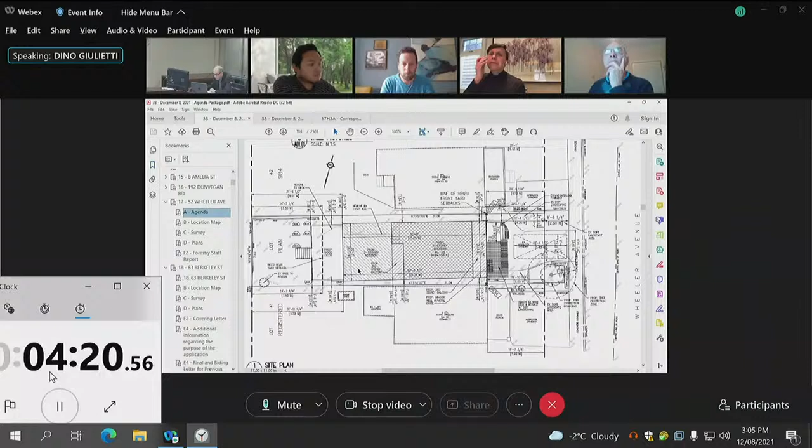The southern property line and the southern main wall are not parallel with each other. In fact, as the main south wall extends towards the rear, the side main wall is skewed towards the property line. Also, there is an existing poorly constructed 1-story rear addition that will be removed and rebuilt. The removed rear addition currently has a 0.11 meter side yard setback. So what we are proposing is much better than what is existing, and we are making the conditions better.

In conclusion, we feel that the proposed variances are desirable and are minor in nature, and that the design is in keeping with the changing character of the neighborhood while still maintaining the general purpose and intent of the zoning bylaw, and so would respectfully request your approval on our application.

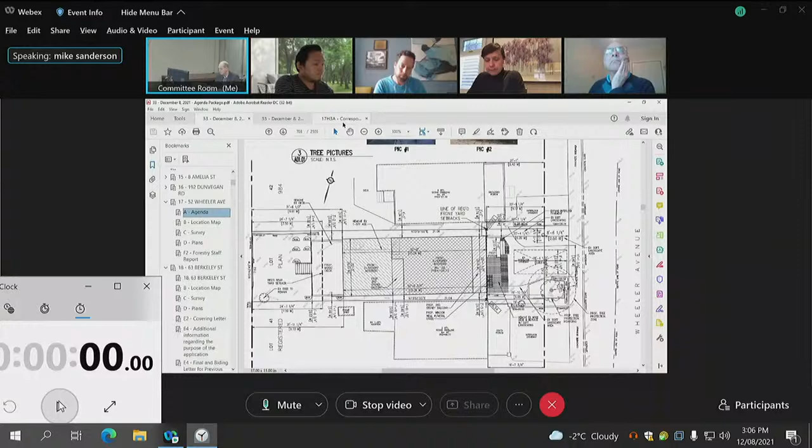Okay, my name is Mike Sanderson. I'm the owner of 54 Wheeler. Unfortunately, I was unable to get my neighbor to the south at 50 Wheeler to register in time, but he's also in support of my position.

My concerns are many. The exterior wall height of 7.5 meters, which is 24.6 feet, is now 35.2. The roof height will be 35.2 feet, and the lot coverage will go from 0.6 to 1, which is a 66% increase.

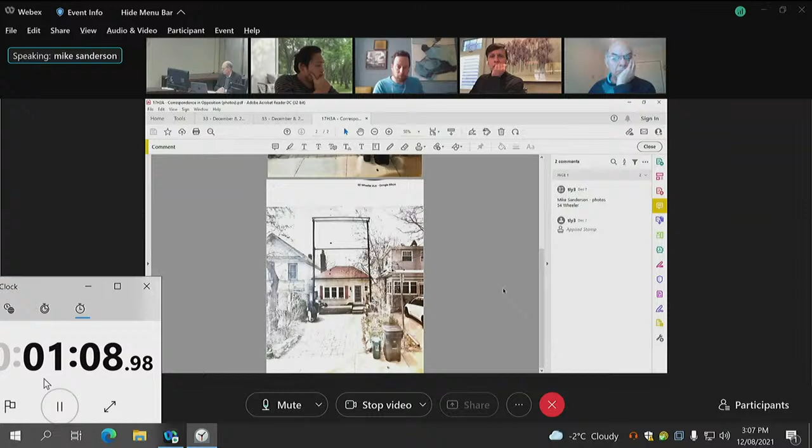I actually had 2 drawings. A picture's worth 1,000 words. I'm not sure that's the case in my renderings here. However, yes, there you can see the impact of what would happen to my house, and my light would be completely obliterated. I'd look out my upstairs bedroom window. If I looked straight, I'd look into a wall. If I looked up, I'd still look into a wall. I'd have to stick my head out the window to see the sky. So that's one of my main concerns.

I do have concerns with water mitigation. As you can see, the front driveway of their property is completely paved. There would be very little space at the back of the house.

And as the architect said, it slopes towards the back and to the south, and there'd be very little table land left to absorb that whole entire roof area that they're collecting. So I think it's completely out of character with what's going on the street. All the houses are old beach type houses, there's some new ones. It is maybe a great drawing, a great architectural rendering, it's just in the wrong location on too small a lot. So it's basically light, and it's excessive overreach, I believe.

Thank you very much. And I do have one other concern: during these proceedings, the applicant tried to contact my daughter, who will be living there, and he tried to contact me in order to find out what our objections were. I find that, I don't know if it's illegal, but it certainly was irregular, and it spooked my daughter quite a bit.

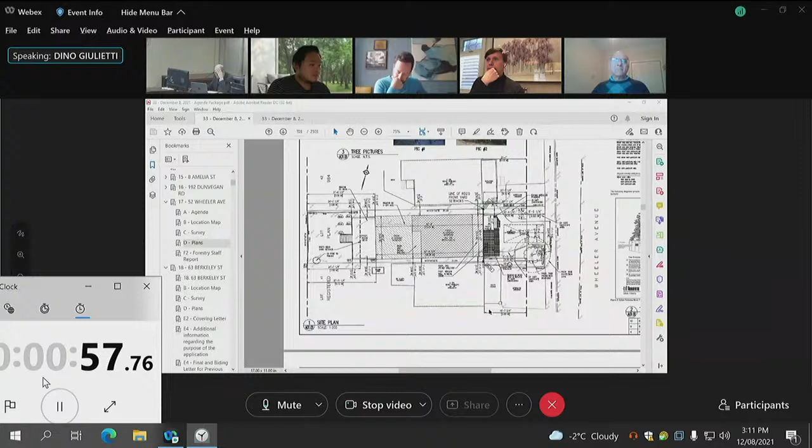There's a property at 35 Wheeler that has a similar situation in terms of, it's a 3-story house. Actually it looks like a 4-story because it has a garage below it, but it's only a 3-story house. And on either side of that house are much shorter single-family dwellings. So we're not changing any of the character of the neighborhood, we're adhering to it. Most of the houses on the street are 3 stories, 2.5 to 3 stories. I don't see any issue with what we're proposing.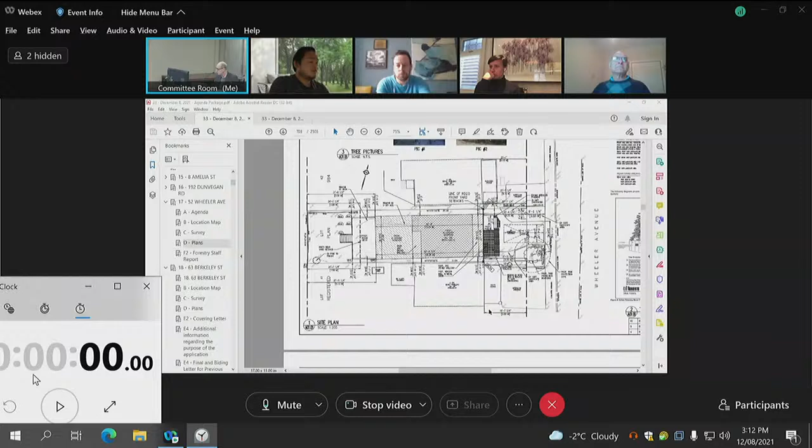Thank you very much. Okay, I'll begin with a question then. The treatment of your front yard under the proposed application is what? I notice it doesn't seem to have drawn a soft landscaping variance. There's interlock pavement now, and there was a wider front porch, which we are reducing in size and adding soft landscaping. So directly in front of the house and on the south side of the proposed front porch, that'll be soft landscaping. Okay, thank you. Any other questions, panel?

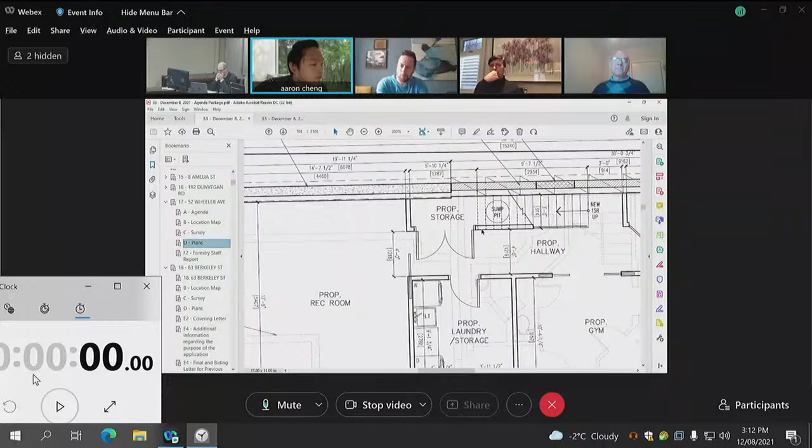Go ahead, Mr. Cheng. Hi, hello. I just have one quick question about the height and the shape of your roof, because I think that's how you trigger some of these variances. So the first one is the maximum permitted building height, I guess they were measuring from the top of the parapet. And then there's the fourth one. I think the original idea of the zoning bylaw capping the side walls at 7.5 is to maintain a hip roof type of style along the street, and you have a flat roof design matching with the 10.75. So I just want you to talk more about that. What's the rationale behind it? How do you think it would impact the streetscape? Do you know if there are any other examples you can share with us?

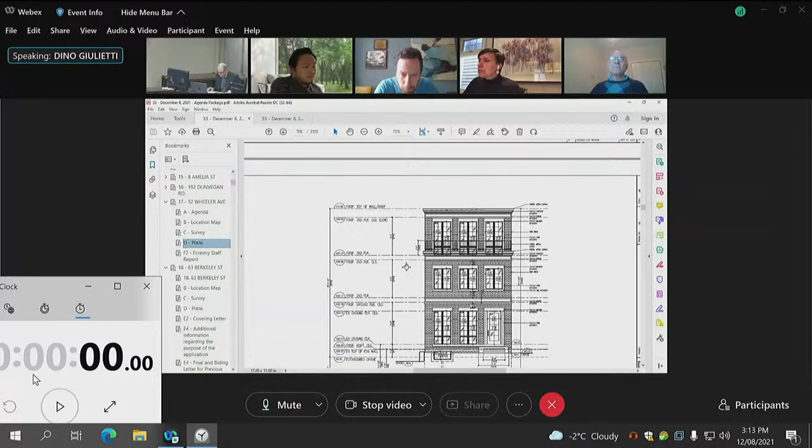Yes, 35 Wheeler Avenue has a 3-story flat front face of their dwelling. Ours is at least on the 3rd story stepped back 1.5 meters to try to mitigate the impact of this on the streetscape, so we wouldn't have an imposing 3-story straight up right next to the neighbors. That's why we stepped back the 3rd story. My client wanted a more modern design with a flat roof, and he wanted to be sure to have full height walls on the 3rd floor, he didn't want to have to deal with knee walls. It's just part of our design. The zoning bylaw doesn't really take that into consideration with their short wall heights that are permitted.

Okay, I see that now. Thank you. Okay, thank you.

Hearing no more questions, let's take this application into committee for a motion or discussion. If anyone wants to offer any thoughts, Mr. Back, go ahead. Thank you, Mr. Chair, I'll just start.

I personally don't see a difficulty with the application. It is a changing neighborhood, and it's certainly the style of the project that's very common these days - flat roof, squared off building. While I understand the concerns of the immediate neighbor, I believe it's to the north, it's one of those dilemmas that I suppose are part of the changing landscape, as it were.

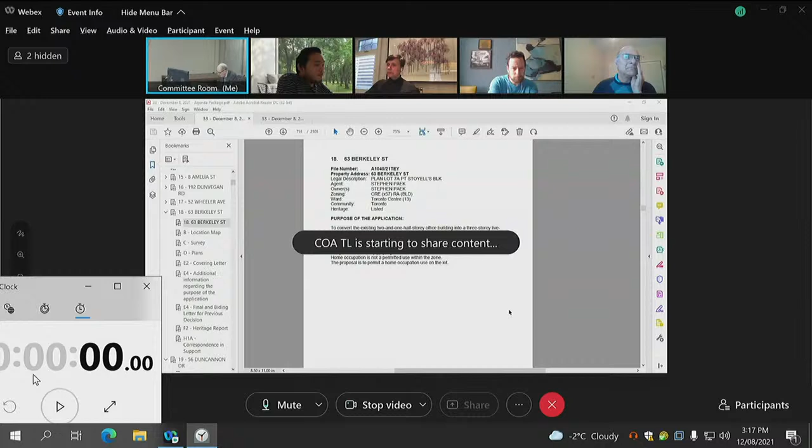Panel moves along now to number 18, 63 Berkeley Street. We've got submitted materials: covering letter from the agent, August 13; a final and binding letter for decision on a 2020 Committee of Adjustment decision; email correspondence from the applicant, 1 December; staff report from Heritage Preservation Services; and 1 letter in support from 57 Berkeley, Saul Chernos.

So let's have the applicant join us. Good afternoon, everyone. My name's Stephen Park, and I'm the owner of 63 Berkeley. You're the owner. Good afternoon. All right, anyone on this application in the committee wishing a presentation or any questions for the applicant? No? All right then, I think we can move right to a motion in that case.

Mr. Reed, go ahead. Yeah, I remember this application from before, and it's extremely benign. It's surprising that a home occupation is not permitted where a commercial one is and a residential. So I think this is just really smoothing out a strange zoning bylaw condition. I think there's 0 negative implications from approving this, and it's a minor request. So I move to approve the application subject to the heritage condition from December 8th.

Second, Mr. Byatt. Moved and seconded to approve, subject to heritage. Those in favor? Unanimous vote. So the motion's carried and the application is approved.

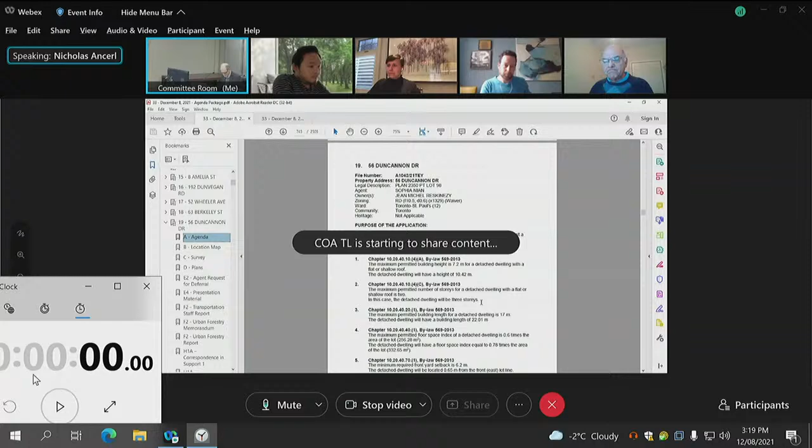Okay, Nicholas, could you tell us please why you would like to have a deferral? Yes, so we got a notice from Forestry against this application. Since then, we had a phone conversation and meeting with them, and we also met with some of the neighbors, and we'd just like - we also spoke to the neighbor, and they agreed with us. So we'd like a little bit of time to basically adjust our application to best satisfy everyone we can.

So are you planning consultation with the neighbors during that time? We've already met with the neighbors, so based on what we do, we will circulate it with them, and I think about 4 of the neighbors came out when we met them. We're also planning to work with Forestry a little further as well.

Look at the forestry concern. Well, okay then, so in this situation, we have a number of neighbors dutifully registered and standing by to deal with the application today as it stands. The committee will make the decision of whether or not to defer, but we do want to speak with the neighbors. So I'm going to do that now.

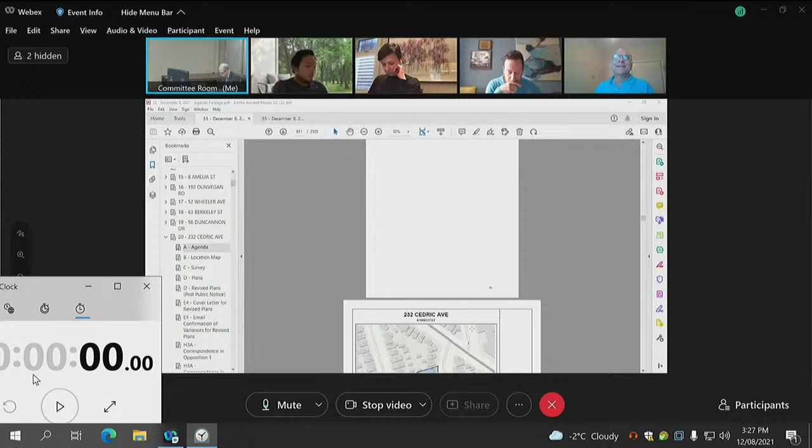This is number 20, 232 Cedric. On this application we have applicant materials, revised site plan dated 19 November, covering letter from the agent 16 November, email from the agent 16 November, and correspondence in opposition from 234 Cedric Avenue from two parties, Pedro Martins and Chow Duong.

We'll ask the agent to join us. Hello, good afternoon, Chairman and committee members. My name is Eddie Peres, I'm at 537 Rogers Road. I'm here representing the client and the designers. Very good, thanks Eddie. You'll have 5 minutes to present the highlights of your application to the panel.

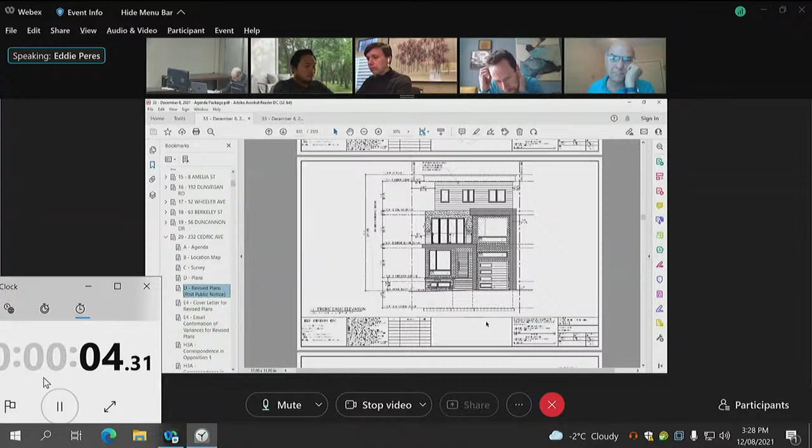As you can see, we're proposing to build a 3-story building. If you can put up the elevation, the 3rd floor is just a partial 3rd floor, it's very modest, set back on both sides. We have a variance of cover. Floor index, we're only over by 0.1, which is 0.81. The length, we're over just by 13 centimeters. The height, we're 8.5, we have 10.14. And the side yard is 0.61.

That's the side where they're saying about the right-of-way. We're not infringing on the right-of-way because the right-of-way is 0.53 and we're leaving 0.61. Just to note, number 6 variance, I'm going to remove that feature, so there won't be a variance for number 6. We're going to line it up with the existing house, so there won't be any projections, because I realize it's on top of the right-of-way. So item 6 will be omitted. Thank you very much.

You are deleting item number 6 - is that the only one? The front elevation feature going over beyond the wall - we're going to put it flush with the wall. Okay, just so we have the application down in terms of the variances: 6 is deleted. Are there any other changes to any of the remaining variances? No, there isn't. Thank you. Okay, very good.

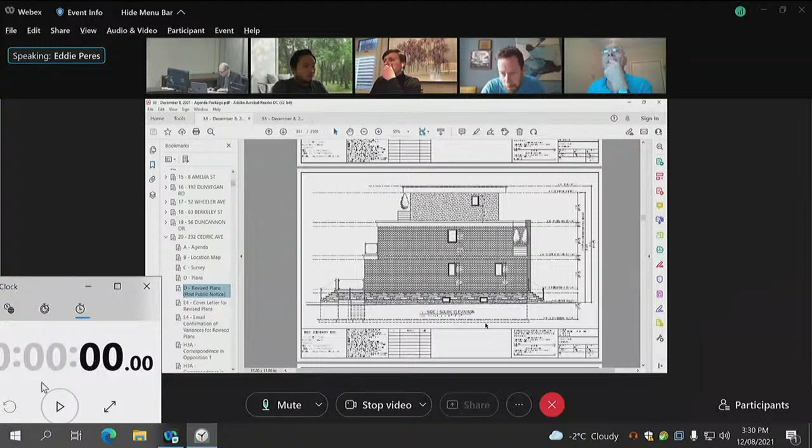Let's then go to the speakers that are standing by and registered. Pedro Martins. Hello there. Hello? Yes, you are with us. Hello? Sorry. State your name please, you're with the panel now. My name is Pedro Martins, I am the owner and resident at 234 Cedric Avenue, the house directly to the north.

I'm glad I just heard Mr. Peres say that he's removing the variance request number 6. I still have some concerns though with number 5, mainly the height and the length of the building. Being a 3-story, I'm fine with all that, considering that's what's happening in the neighborhood - that's what everybody seems to be doing. But my concern is the protection of my right-of-way, the access in and to my garage with my vehicles.

If you look at the basement floor plan drawing - I numbered that number 5 in the paperwork I sent to you guys in the PDF file - it shows there's a washroom and a furnace room. This furnace room is going to require venting, and my concern is that at the requested 0.62 meter setback from the side lot line, this furnace is going to need to be vented, and I'm concerned that this venting will extrude into the right-of-way. The current house is at 30 inches from the property line. If they can maintain that 30 inches, that will ensure that this building will not interfere with my access into my driveway.

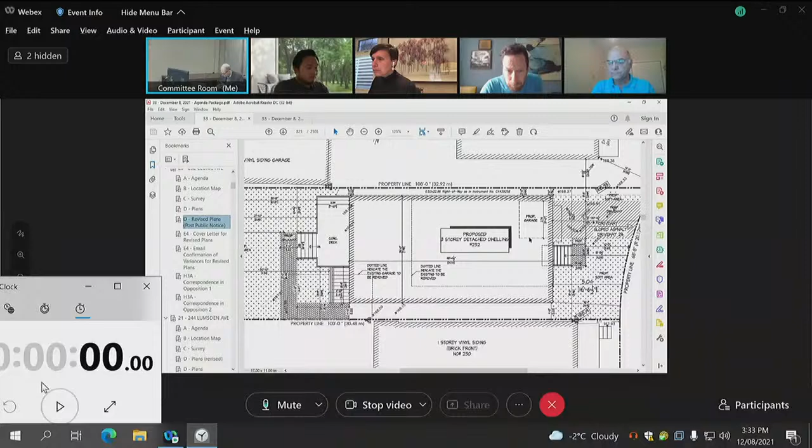Yeah, hi, I'm joining from my car. Thanks for calling me. I was online this morning for 9:30, but I realized after attending that the sessions do run over time.

So thank you for whoever called me, I appreciate that. Again, with my neighbor, Pedro Martins, I oppose this simply because it's going to be a very large structure and it's directly across from me. We don't have a lot of skyline left in Toronto. For me, I'm not on that same side as Pedro. It's going to basically block the evening sun.

It's a western exposure. It's going to create more traffic, and I'm just tired of construction on Cedric Avenue. We've had a lot of construction. It's continuing, it's ongoing. There are small children on the street, and I just wanted to have the opportunity to voice my opposition to this application for variance, and that's all I'd like to say.

Thank you very much for calling. I think that's the final speaker, right? Okay, we can go back to the agent now. Yeah, I heard the gentleman's, what they're asking for. Go ahead.

We won't put any vents or anything on the right of way. We can either do it to the back or through the roof. I'll make sure I make a point of it to put on the drawings when I do the drawings, so there won't be any venting to the right of way section.

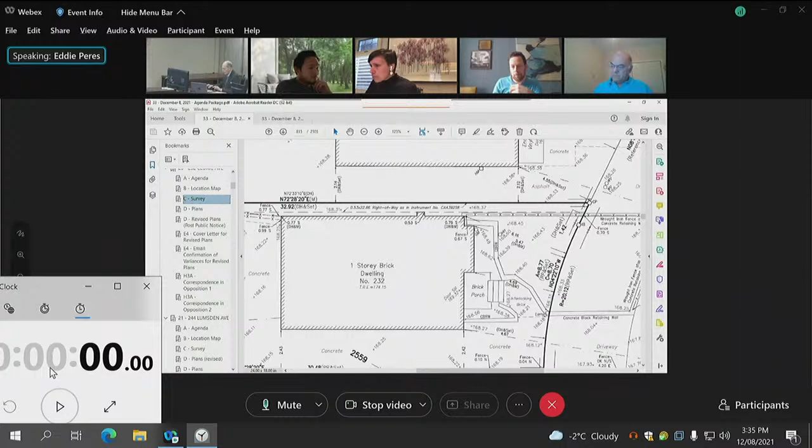Hopefully you agree with me. Thank you very much. Panel members, questions for the agent? Hearing none, we can take the application into panel.

I just ask, sorry, go ahead. Mr. Chair, I was just looking at the survey. So you're going to be clear of the right of way? You're going to be right up to the right of way? What's the situation? No, the right of way is 0.53. We're leaving 0.61, so we're leaving more than what the right of way is. Okay, thank you.

Very good. We can go into committee on this application now. Anyone have any comment on it or a motion? Mr. Byatt, go ahead, please. Thank you, Mr. Chair.

Looking at all the plans, I think the applicant appears to be quite accommodating, both for the right of way, not just the width of it, but also the venting issue. I think that's quite accommodating. Looking at the design, the third floor is also quite well set back. There are changes happening, the days of bungalows seem to be coming to an end, so I think that's part of the pattern for the future. Density is certainly increasing.